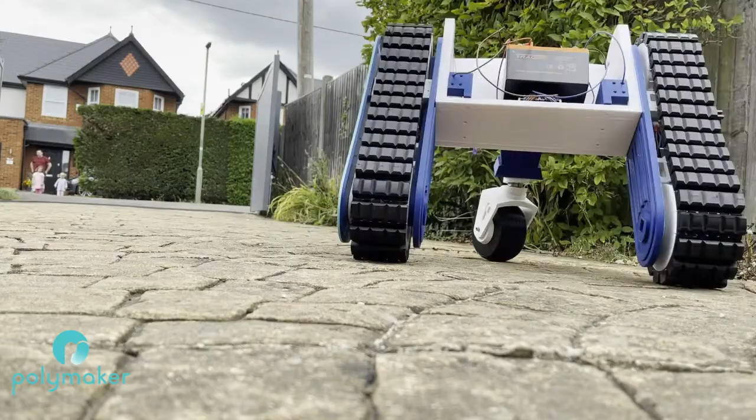Nice, and you know what, it's really, really good. I've greased the internals of the gearbox. When I was greasing that up, that's absolutely fine, no issues at all. It's not silent, but it's also not particularly loud either.

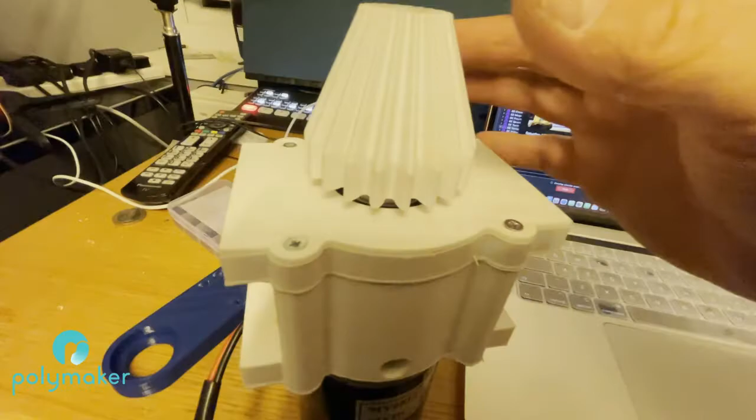And the other part I haven't done yet is where the almost triangular gearing goes on and connects to the inner wheel. I haven't greased that up yet, but I'm assuming... Okay, the bevel gear. Yeah, so do I assume I've got to do that as well, or is that a little bit... Yeah, whack them in there? Put some grease on there, yeah.

It runs really smoothly, it's a lovely drive. And there's a lot of torque in it, a lot of torque.

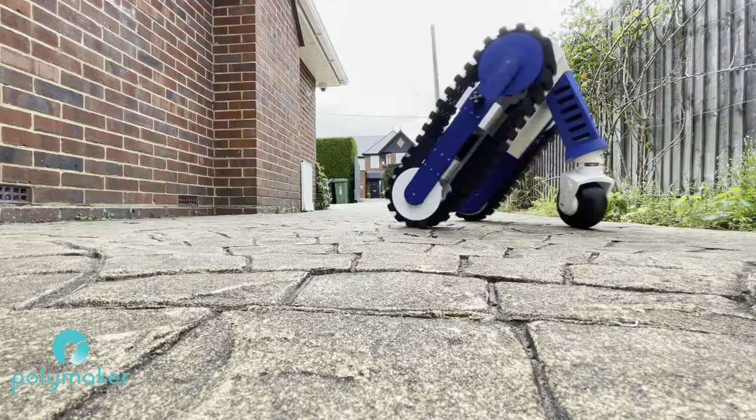Yeah, it's exciting because I really want to get this finished and done and get it moving around. And it's almost at that point, with R2, when you get R2 moving for the very first time, because this has not been done before and it's kind of exclusive to us right now. I'm at that point where it's very, very exciting again.

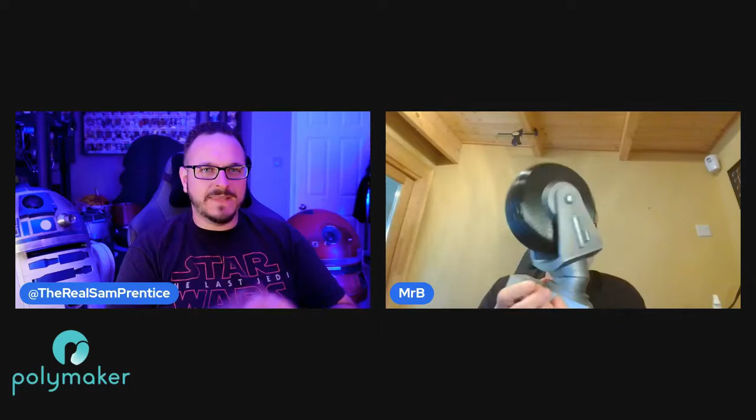So I've got the caster. So when you built the caster, this is what it'll kind of look like. Yep, it's a really strong build, as you can probably feel from yours, but you've got this other piece here which goes onto, which then this bolts onto that leg that you've got. And yeah, they're a nice run.

What is it, 95 you said, on the TPU? This one's 90 actually, but 90, okay. I think I put about 20% on it, and it has made it really, really strong.

Brilliant. I did another test print as well, and I'll show you, I'll actually just grab that. So I used TPU95, and this was 20% on this particular one, and it's nice and strong, like you'd expect a tire to be. I didn't want too much flex in it, but I did also print this in 10%, and you can really see on this one that it's got that real bend and flexibility to it as well.

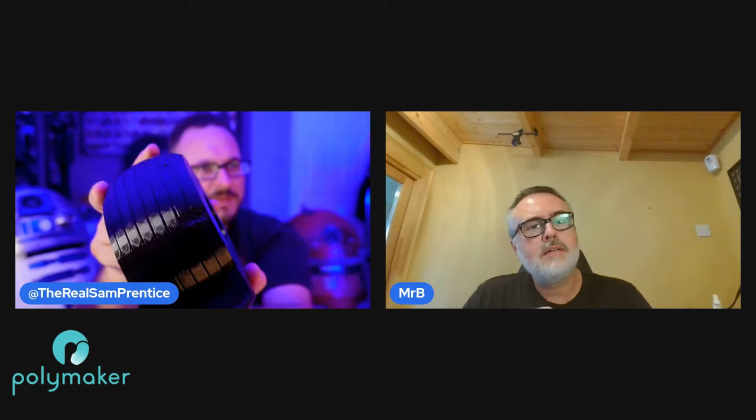But what I found when I was printing it - can you see that little gap? That's on one of the Z seams there. There's actually a couple of them as you go around. You see these little bits here? I think that's because it was a little bit too hollow, especially on that particular angle.

So I changed it up. I printed the new one on the RatRig - this was done on the BIQU BX. I just wanted it to print without any issues, so I figured the RatRig was probably going to be the better way of doing it.

But I'm going to try both tires, I think, even though it's got that little bit of undulation on there. I don't really want to be representing PolyMaker with an inferior tire.

But it's cool. I don't know if you've ever printed a phone case or anything like that with TPU - I haven't, but it's something I'd like to try because it's an interesting format. And the TPU is fantastic, it's brilliant.

Yes, these are the ones I use in these smaller track droids, and this has probably done about 2-3 days worth of running on concrete, and there's nothing on it - it's not even marked. It just lasts.

And like you said, the 95 is quite good because you don't want it too flexible. You want it fairly solid, particularly on track. So yeah, really impressive.

Anyhow, so you've got 2 drives, you've got a back wheel. You need something to pull it all together, don't you? Ideally what I'd like to do is put a 12-volt, 16 amp hour tracer battery in there.

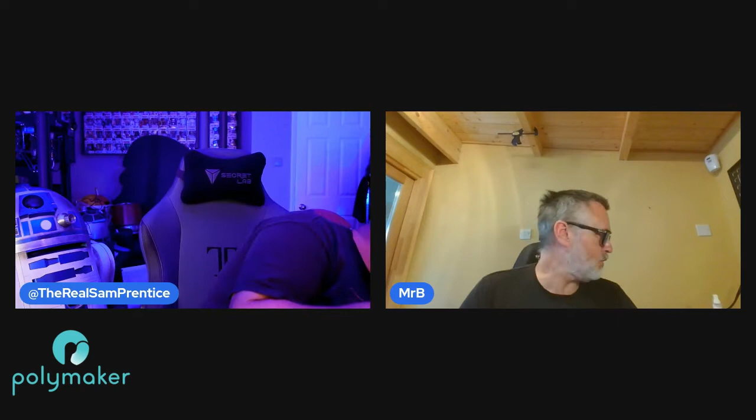The other thing is I bought a load of 25 kilo servos - I bought the 25 kilo servos, which are here. And I've also bought some orange...

A couple of things that I bought are a couple of orange receivers as well, so I can use my DX9 on this.

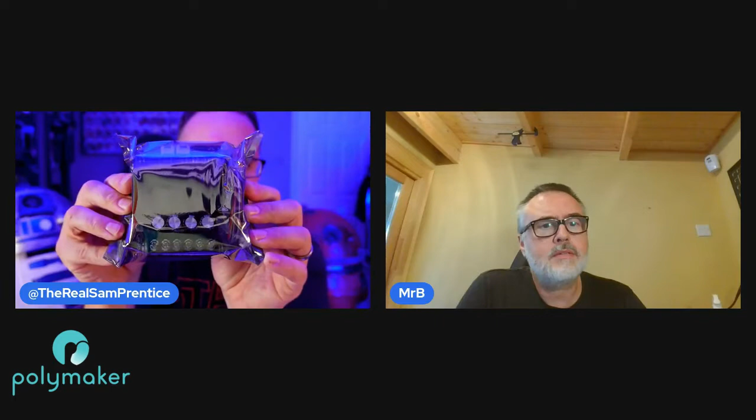Brilliant, DX9. Also, Cytron do a smart drive 30 amp unit here, which I know is probably a little bit overkill for the bits and pieces we normally make, but this is a 30 amp radio controlled receiver that does tank drive.

It's a bit like a Sabertooth, but that's Cytron. I hadn't seen it before, but it does - as you can see here, there's the little remote control here.

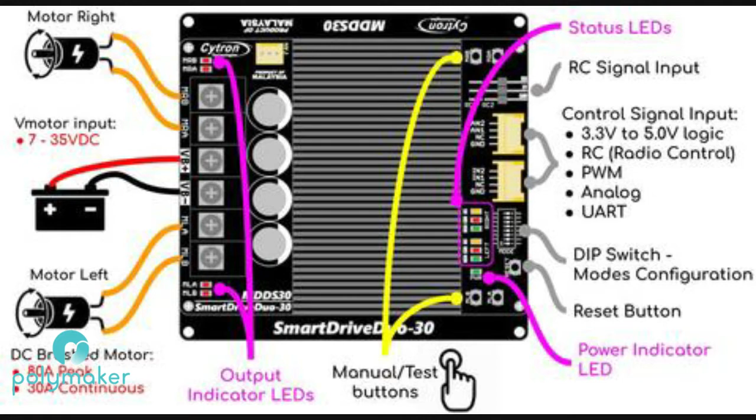But this is called the MDDS30. If you're interested in setting one of these up, from memory it was about 30 quid - £28, 15 pence of your English.

And if you look here, you can put up to 35 - it's 7 volts to 35 volts. It also has a microcontroller part here, and I believe you can put servos on it.

I want that now, that's going to be my new favourite toy. I haven't told anybody about this. I should have just remained quiet. You should have done.

I didn't even know about the microcontroller bit there, but I've got a sandcrawler that needs one of those. Steering on channel 1 and channel 2 - it's RC, because a lot of these Cytron ones are normally Arduino only, PWM programming.

So to find this that does radio control parts, the MDDS30 Cytron SmartDriveDuo - I'm going to buy a couple of those to play with. I run the DO on the MDD 10 amp, but every one I've seen of the Cytron ones have been Arduino or serial control, not using standard PWM from RC.

So that is such a good find, I need to buy some. I do really rate the Cytron stuff, even if you buy it from abroad - it's Malaysia I think. I got this from a UK supplier, can't remember who off the top of my head, but I can Google it. That was super exciting.

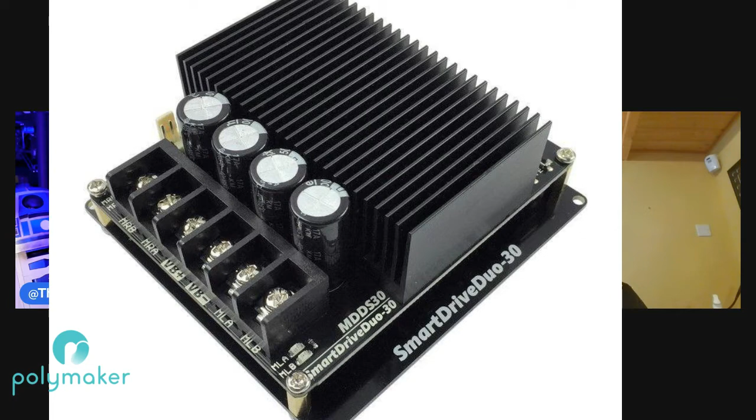It's got 80 amp peak, 30 amp continuous on each channel, onboard MOSFETs, switches at 18 kilohertz for quiet operation, and a battery low voltage indicator as well.

The funny thing is I went on the website and thought, does this work? Because the DO obviously runs off an Arduino. Ironically, when doing the Droid Builder series on YouTube, I found a load of motors in a cupboard, thinking one day I'd just whack an RC unit on it - but it doesn't work. So it was really refreshing to find this particular unit, and I'm hoping it's going to work and be awesome.

So they're out of stock at the moment, hopefully they'll be back in stock at some point. I kind of felt like I might have bought - no, I only bought one. I was going to buy two because I thought people might then try and jump on this. But it is what it is - if you can get hold of one, great.

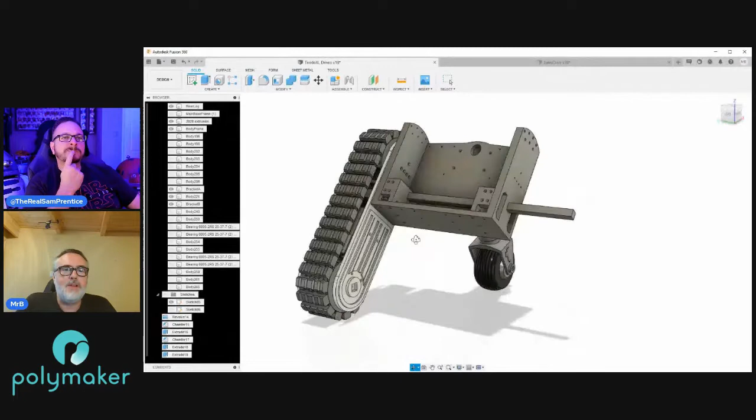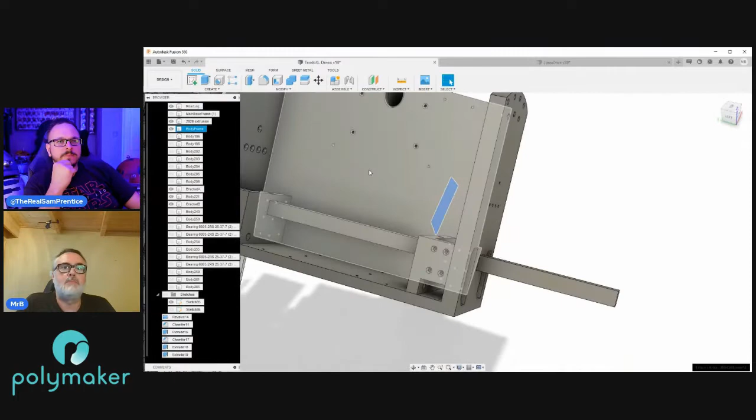So you've now built the drive on both sides, and you've got to imagine it's got another leg. The leg that you printed with the layer shift is this one at the back, and you've got this frame which is also in there to print - that's what I showed you before. That bolts in with 4 bolts at the bottom onto the leg, and the leg bolts into this main frame with 4 bolts here. So what we've got is this body frame.

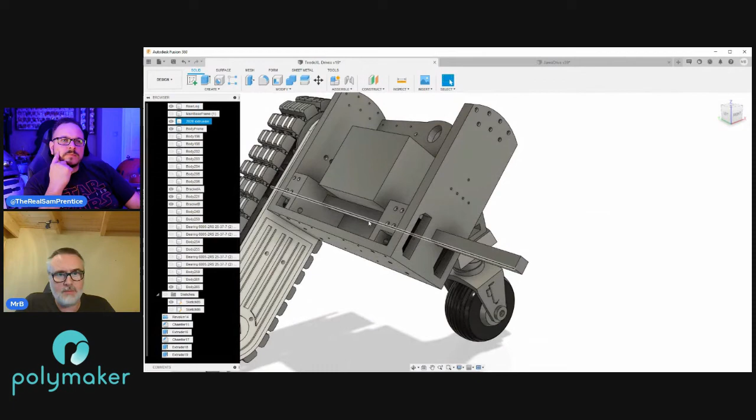You mentioned putting a 12-volt battery in - here's one I prepared earlier. So actually it perfectly fits a 12-volt battery in there, it can drop in and rest on this bar. This is 2020 aluminium extrusion that runs right the way through, which presumably is where this little hole is here.

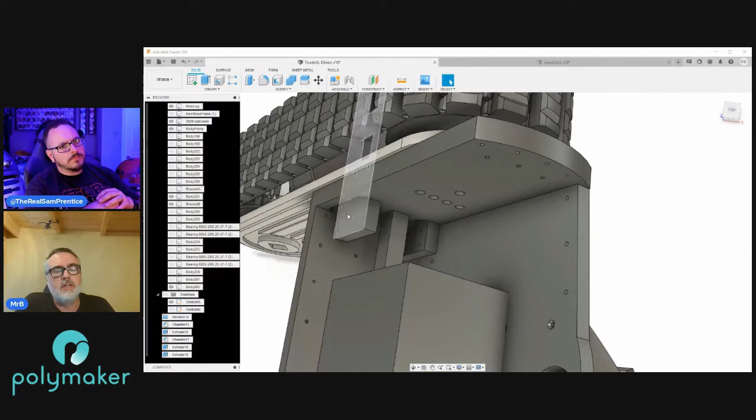That's where that 2020 is going to go into, right? That's right. The 2020 goes through that hole, right the way through, and then there's these little brackets that go on. You've got the 2 tabs on yours as well, haven't you? These 2 ones that stick out - those 2 tabs fit through that hole, and your 2020 goes right the way through.

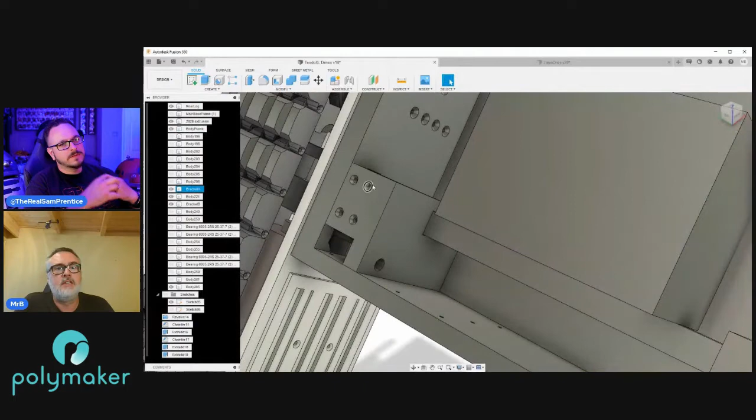The bottom tab bolts in with probably slightly too many screws, but you can never have too many bolts. And then the top one, you've got a bracket that goes over it like that, and that effectively holds this on. The power cable goes through that hole there. There's a couple of holes for cable ties, and then the cable will come through into the main body here.

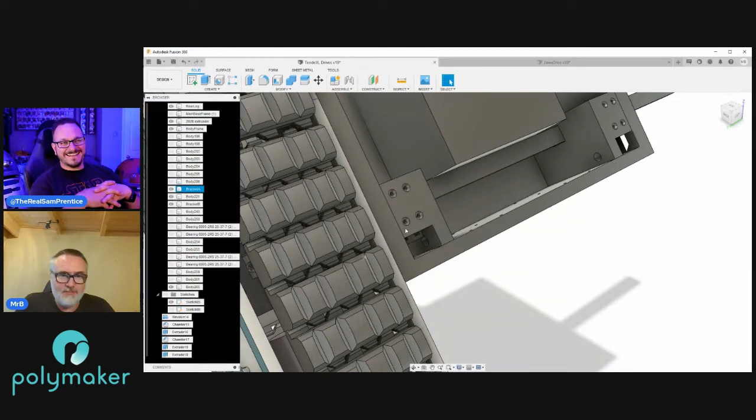Christ, Mike, what have you been drinking? That's not the gin in there again, is it? No, it's that special lemon water that we always like.

So yeah, that's your cable harness. Cable goes through to there.

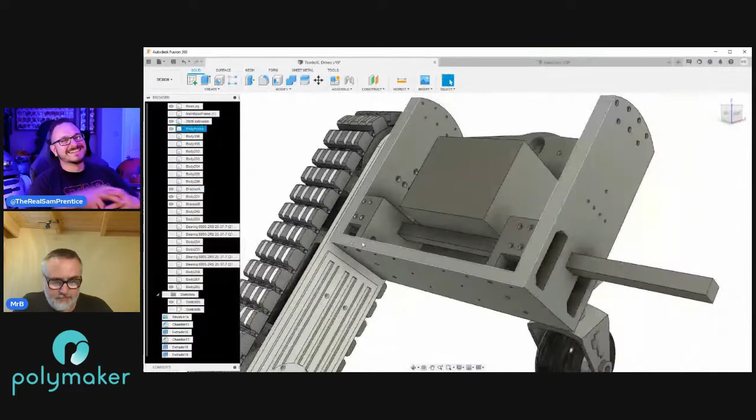We can recreate it. So two brackets - this is the main base. The exciting thing this time is you're only 3 prints away from actually having something that can roll around. I know, how cool is that? Because you've just got this box, these 2 brackets - get that connected up and get that running.

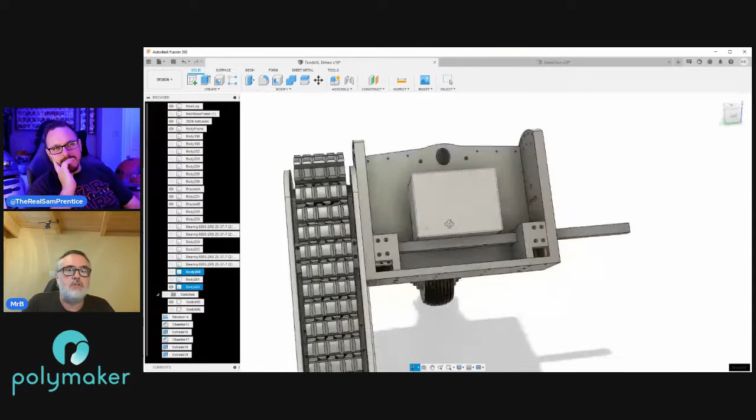How long is that extrusion here? It's about 500, I think. The reason I ask is I've got an old CR10 S5 that might be redundant now, but maybe there's parts of that frame that could be reused. It's got Creality inside, maybe worryingly enough. But yeah, I think that would suffice with that.

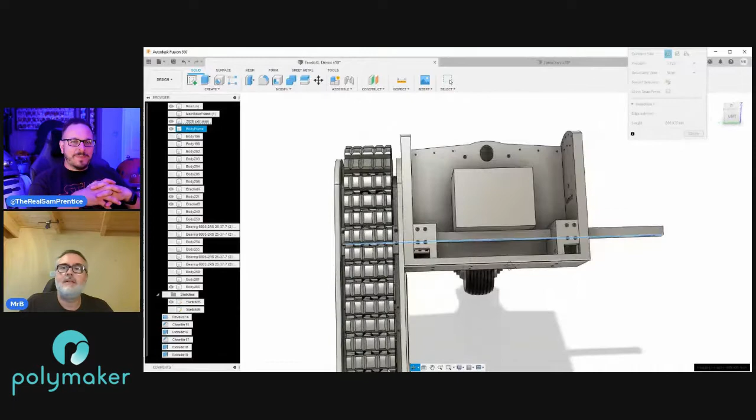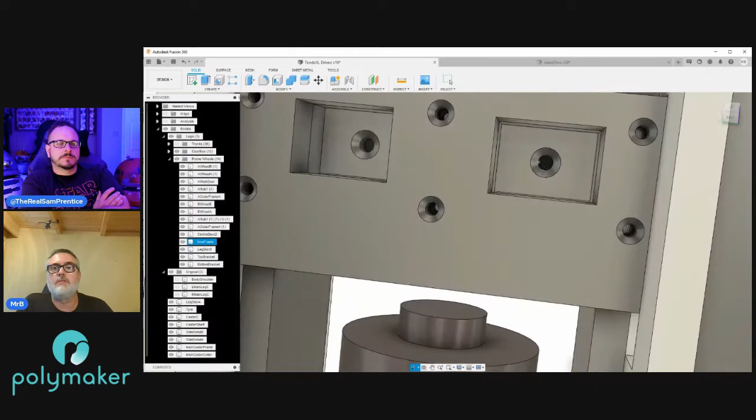So internally of the track bit, there's nothing that holds that in other than the fact it's stuck there - how does it not come off? Do you know what I mean? Yeah, so the 2020 extrusion goes into these slots here. You'll have a couple of T-nuts that slide inside the 2020, and then a couple of 4 mil bolts that will go through there. So once you tighten those, it'll pull the extrusion into the plastic, which means it won't come out - it'll be solid.

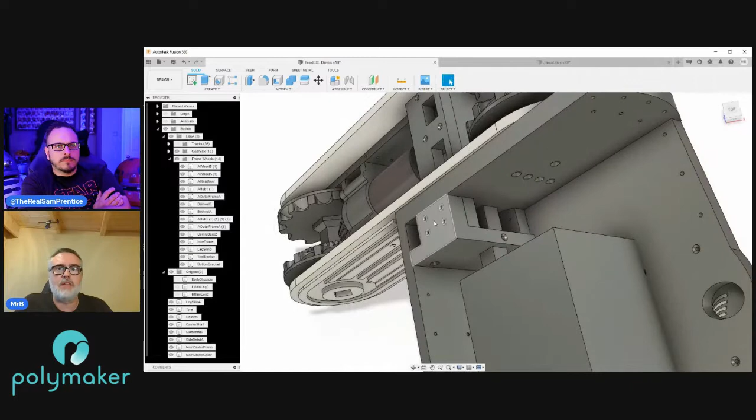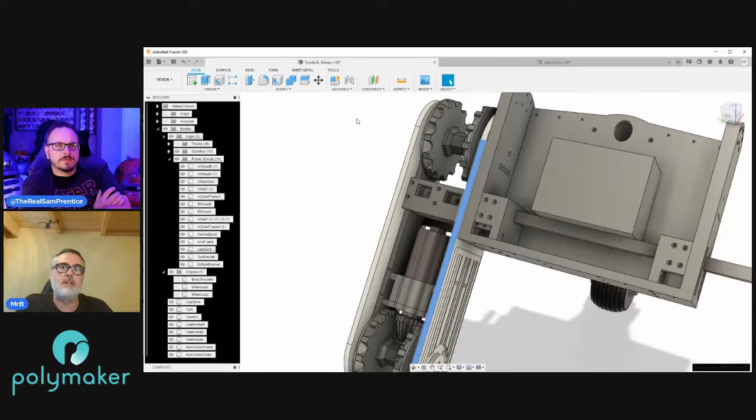Great, so that'll hold that bit solid. But as well as that extrusion, you've also got these two plastic brackets, so between those, that'll give you a huge amount of strength in that area. And then there's a series of 4 holes here that bolt through this face into the main frame. So you've got it locked in at the hub of that top drive, and you've also got those 4 bolts in. It's a bit like R2 - the weakest point is always the shoulder, so that's going to be the weak point. That's why we've got to make sure there's plenty of solid connections on there.

Then you've got the battery, and then loads of space in there for speed controllers, electronics, and all that kind of stuff. Brilliant, sounds brilliant. And then, which I've been messing around with today, if I can find which we've got.

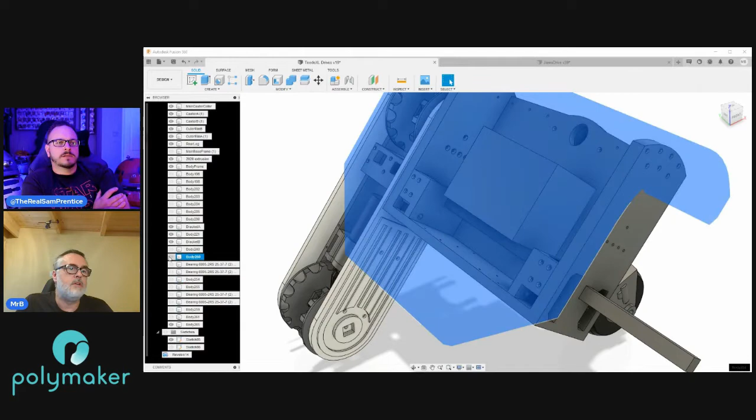So as with the other one, you'll have this main cover that will go over there, which will cover everything. And then you mentioned before about the neck mechanism. Yes, so this is the start of it.

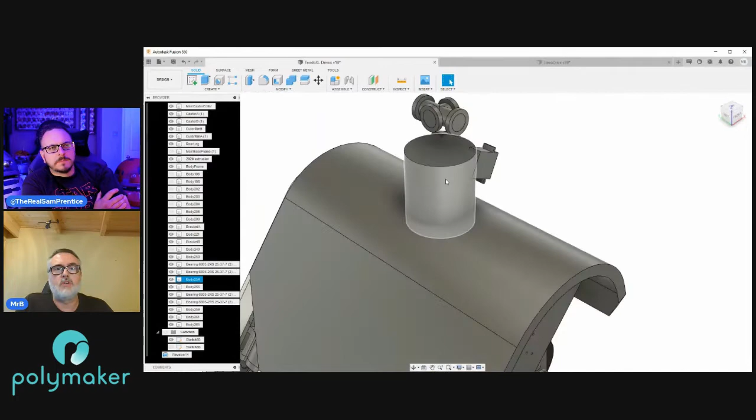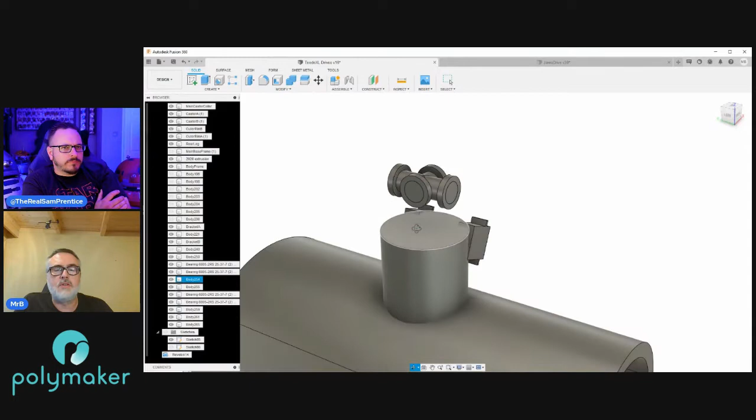What you've actually got is a 100mm circle, and the whole neck will turn around probably 180 degrees, so you can go from looking across one shoulder to looking across the other shoulder, because those 25 kilogram servos are 180 degrees. So that'll turn the head, and then there'll be a couple of bars on the side that hold onto these 2 bearings, which will give you a nod rotation. And then there's 2 more bearings here and here that will give a tilt rotation. So between those 3, you should be able to nod, tilt, and turn the head.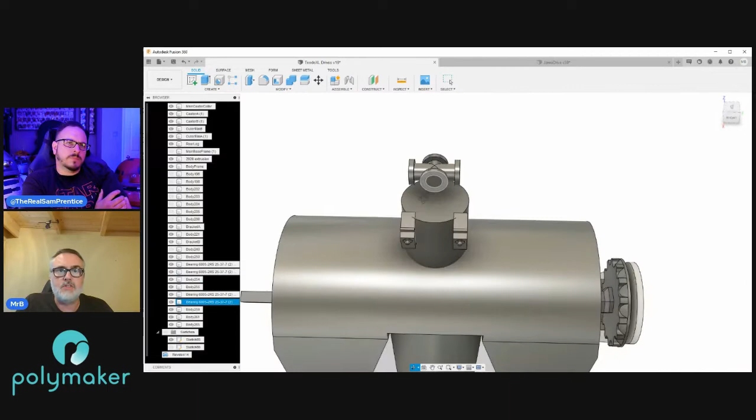What I'm thinking on the head tilts is, once I've got there, there'll be a couple of plates that come from the neck and hold these 2 side bearings on, and then your main head plate will run off these, off this angle bearings here.

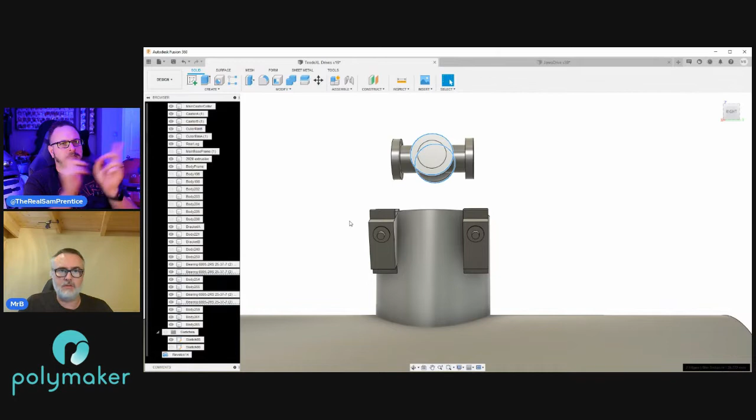And then what I'll do is probably put 2 servos at the back of the neck like that, with little servo arms out that connect to that plate. So if you can imagine, they both go together, it'll lift its head up. If they go down, it'll lift its head down. But then you can also do all of the head tilt and the turn.

Gotcha, so you should have quite a lot of expression. The only challenge with that is finding how you map that onto the RC, because a bit like BB-8, where they put a gimbal on top of the controller. Yes, because you've actually got 3 axes there. If you've got a head turn, a head nod, and a tilt.

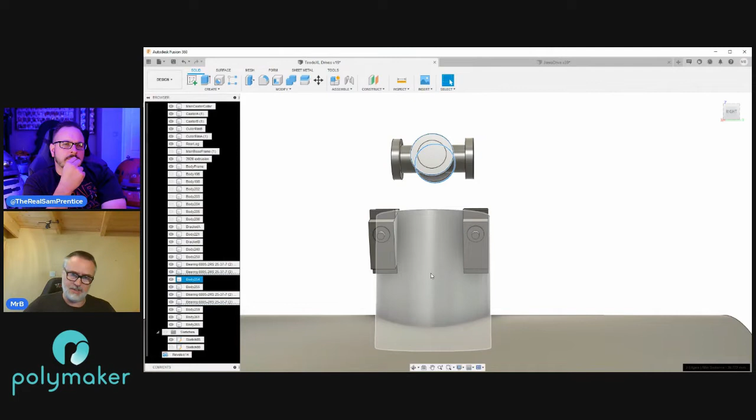Whereas on your traditional stick, you've only got 2 axes. So you can either use one of the little pot dials to do either head turn, or... They do modifications, don't they, where they put gimbals on the end. But yeah, like I said, on the controller that I'm going to use, I have got a pot that I was just going to be able to turn.

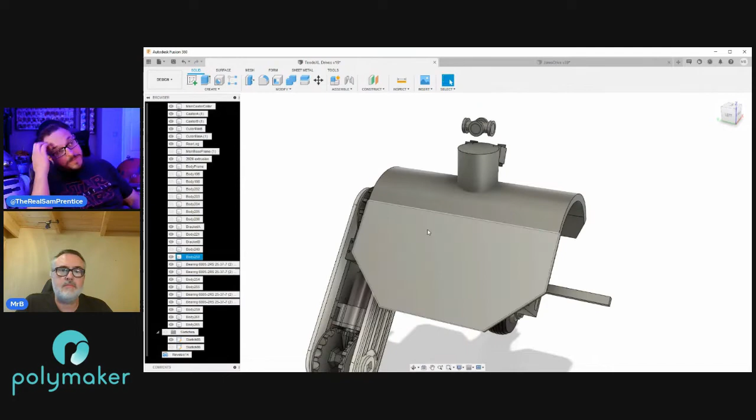So how that kind of works in your hand is up for debate a little bit. But it's that sideways motion, that emotion that I'm looking to try and recreate there. I think that's something that's maybe a little bit more... what's the best word for it? It's also almost bespoke, because normally when you're talking to people, you're sort of talking away like this.

But if someone says something to you that's a bit curious, you might be like, I can kind of see where that comes from. And that's where that one single movement to turn it, and then turn it the other way, is kind of where I'd want to get that motion from. But how that translates onto servos, that's up for debate. Like I say, we shall see how that comes about.

Now, with this controller, having seen a few more things, because I haven't even opened the box until now, I'm just wondering if this microcontroller, because you've got 2 outs there, a ground, an NC, and a bunch of other stuff, so I'm assuming you're going to be able to put power into this. So there could be, perhaps not for this particular model, but in the future, you could buy one of these and run a ton of other stuff off one particular sensor, which could be really, really interesting.

But we'll wait and see how that goes together. With regards to power, we've had this in the past with the smaller baby R2s and things like that, you do get an element of twitching. A lot of that's down to how clean the signal is from the receiver into the servo, and also power fluctuations as well.

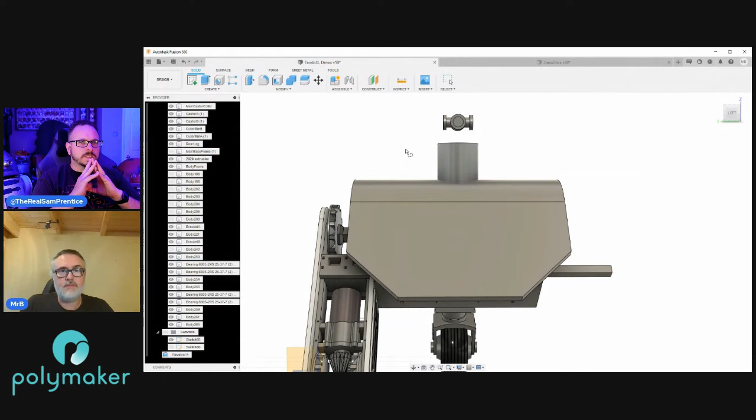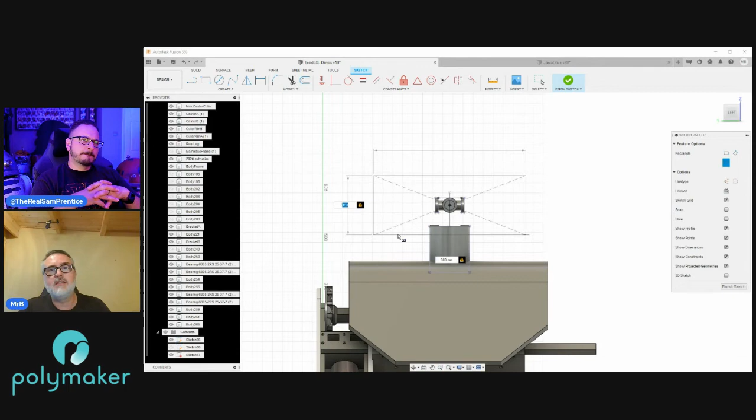So if you look at this, this line across here is 495. I've not drawn the head yet, but if I was to draw a 400 wide head, it's that big. So a 400 wide head is probably not far off. In fact, you might do 380 by about 150, that'd be about the size I think. And then do about the same depth, so probably about 380 by 380.

Balance is going to be something quite interesting on this one. I'm almost thinking like what they do when they balance cars with the tires, it might be worth putting a couple of little bits of lead shot on there, just to make sure. It's an interesting point, because I'd rather the servos be doing the work to go up and down, a bit like a gimbal, that kind of thing.